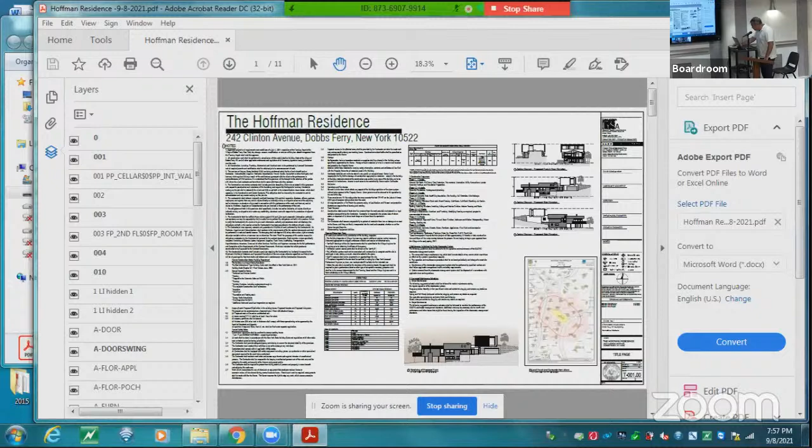Sorry. Is it coming up? It is. That's correct. Okay, better.

Hello, my name is Greg Sharp. I represent the Hoffmans, who are asking for a side yard variance for renovation at 242 Clinton Avenue.

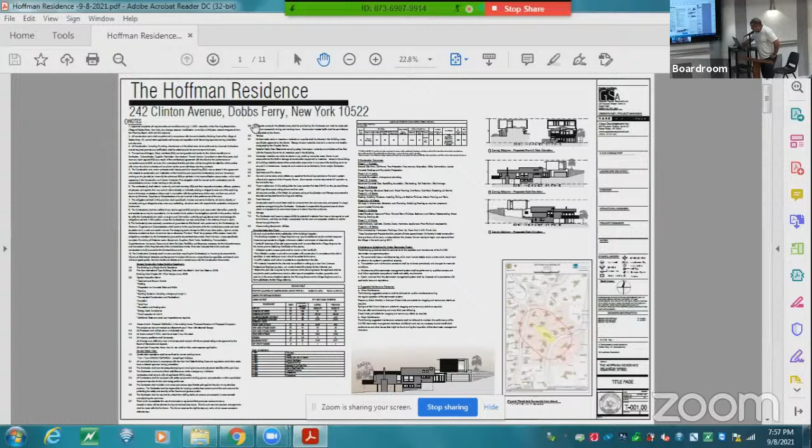This project is on a very complicated site. It's a very steep, hilly site. This project was driven by a number of needs: the hill, and the fact that the clients would like to add 3 bedrooms to this project, but not basically take down the house, just add to a part of the house that will allow their 3 kids to move out of the basement and have some beautiful river views.

The existing house was built before zoning was enacted, so the existing house already penetrates the side yard setback. We are not penetrating the side yard any further than is already being penetrated by the existing house, which is indicated by these blue lines.

These blue lines indicate the current zoning, and this yellow line indicates what we are asking for. We're basically asking for a 4.5 foot side yard variance. This part is the existing house, and this shaded section indicates the amount of new construction that would be over the side yard setback.

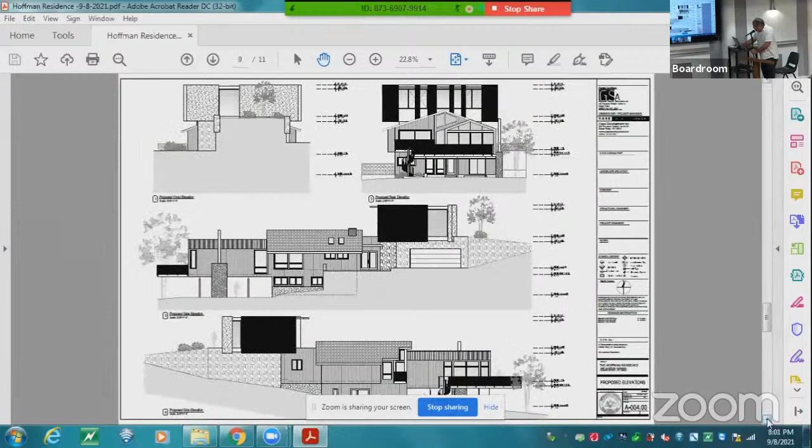This is not the most colorful presentation, these for some reason didn't print out so well, but we do have some renderings indicating what we're doing. From the street, with this new renovation, you will only be able to see the new section of the house -- you will not have a view of the existing house, only a section of this new element. The concept is that we're creating just a very simple modern element.

As you come down the driveway, you're going to come under this new section in order to access the driveway. The garage is in the same position as the existing garage, so the only element extending into the side yard would be this new bedroom wing, which we plan on cantilevering over the garage.

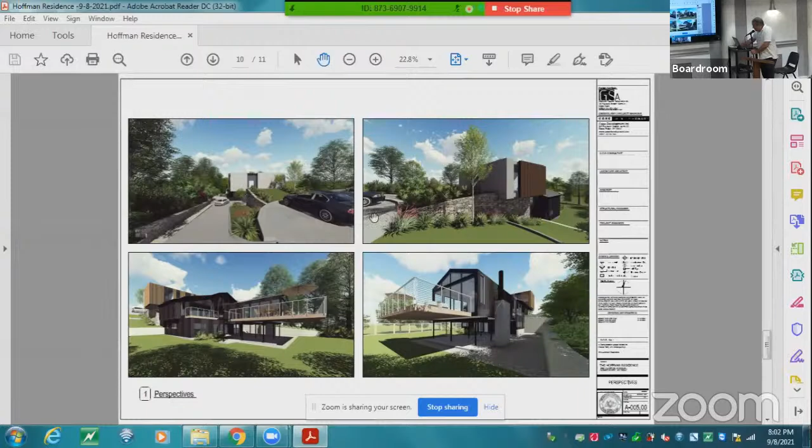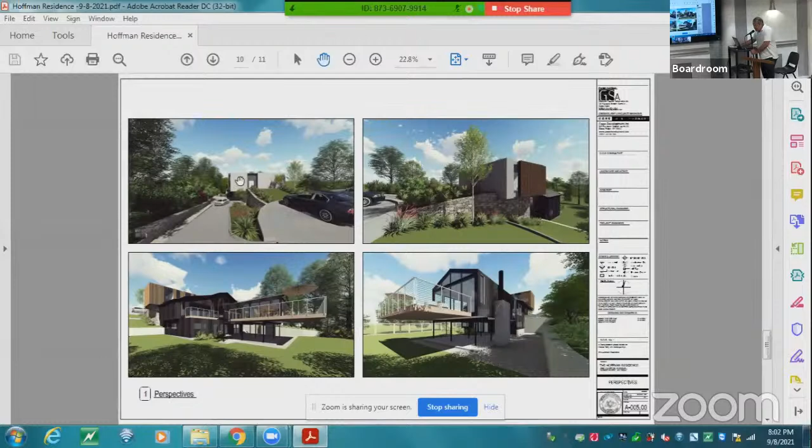This rear section indicates that we want to open up the rear wall of the house -- this is not really part of this variance, but the main component of the variance is not on this elevation, though you can see clearly on this elevation that this is the section extending over the setback. This gives a little bit better view of what's going on.

As you come down the driveway, you could skirt into the garage, which as I said is in the same location. This element representing the 3 children's bedrooms is the component extended over the side yard setback.

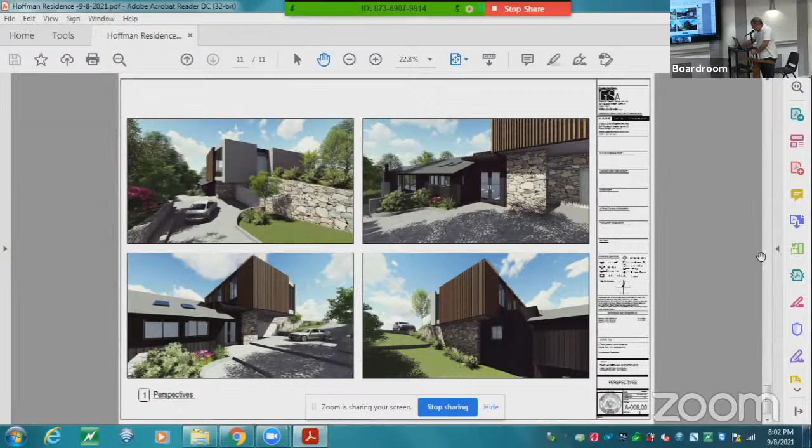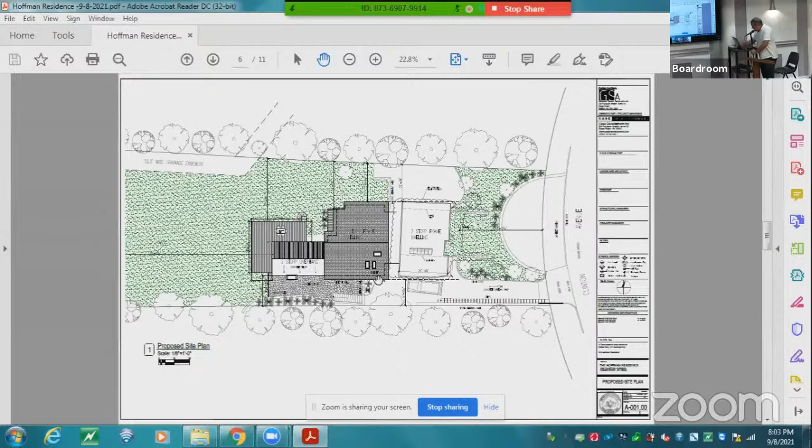So this is the entire site plan. On this side of the property, which I believe is the north side, the house is built to the current zoning side yard setback, but on the south side, the project does extend into the side yard setback, though it doesn't extend for the full length of the project.

On the drawings, it looks like the new portion over the garage approximately meets the roof line in terms of intrusion into that south side. Yes, it's in alignment. Visually, it would be about the same. That's right.

It's in alignment, but the current house is also over the setback line. This house was built prior to zoning, so it was never in compliance in this section. But every other component of the property—lot coverage, setbacks, everything else—is in compliance. So we're talking about just one tiny little problem.

Did you send notices out to the neighbors? Yes, everyone got a notice. He presented it to both of his neighbors, and I know that he spoke with them. I believe they were supportive. I have not heard any negative comments back from anyone. I think they're supportive.

Currently the Hoffmans—like I said, their site is a really unique site. Obviously as an architect I wanted to go crazy with it, but I was held to just the program. The program is to provide beds for their 3 kids who are currently living in the basement, so this is a program-driven project. The idea was really to not affect the rest of the house so the project could be done reasonably. But I still think there was no way to do it on the garage without having a significant architectural impact.

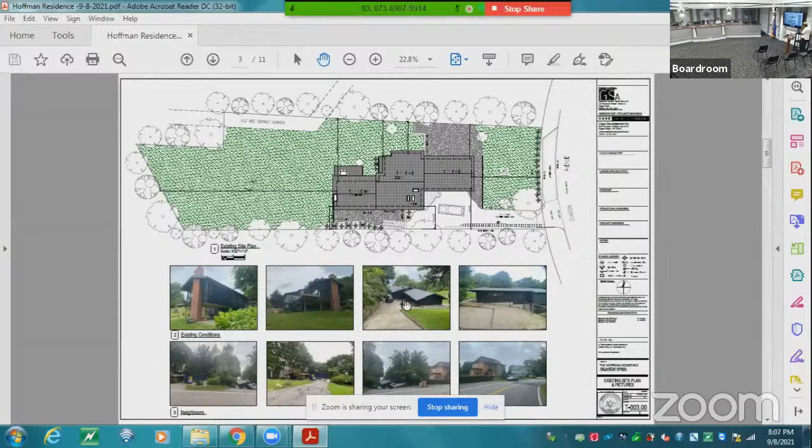It's a prairie style house, kind of unique. There could be all sorts of concerns by true architects about making this kind of an adjustment to a prairie style house, which might—I'm not saying it will—but might lead to a discussion between the ARB and this gentleman and his client that might result in a slightly different outcome. And like I said, if that happens, then they will reapply and come back for that variance.

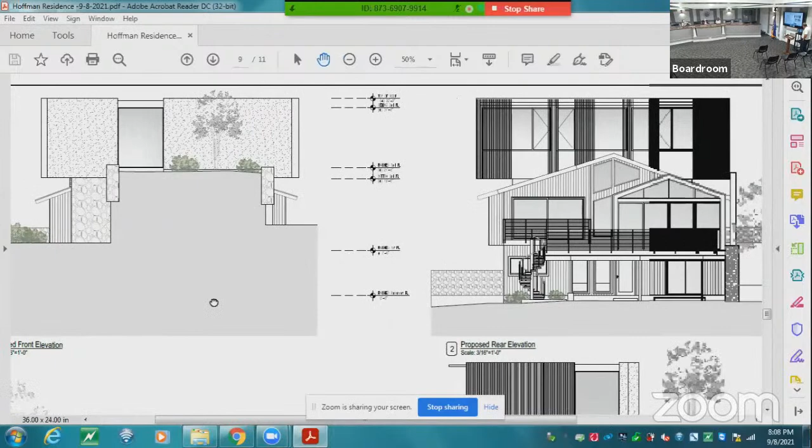I think the existing house's nonconformity versus this is relatively minor—he's pushing it out another foot or so. But it's much, much higher, a very different look, it changes the encroachment, though not the historical style feel of the house. That said, the house to the north is much higher relative to the street, and the other is while it's going to be much more visible, it'll be blocking off the roof, which is the only thing you see of the house now.

Is there anyone outside that would like to be heard on this? Just the resident that lives at 242 Clinton is here.

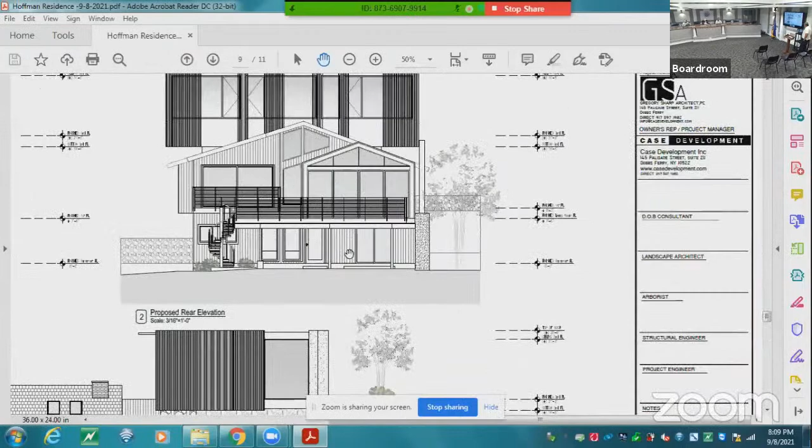We're happy to hear them speak, but we're happy to not hear them speak if they don't feel like they need to. No, I don't think we need to. Waiting with bated breath.

Mr. Chairman, a motion to close the hearing—I'll second that. And then a motion to grant the side yard variance requested in the application, permitting a combined setback of 35 feet, 7.125 inches. Moved, and seconded? All in favor? And that's unanimous.

In addition, our planner is directed to prepare a written decision reflecting the deliberations and the vote of the zoning board on this matter. The written decision will be signed by the chair and filed with the village clerk, with a copy attached to tonight's meeting minutes. That's a new procedure for us, and it will be followed for all applications, approved or not approved.